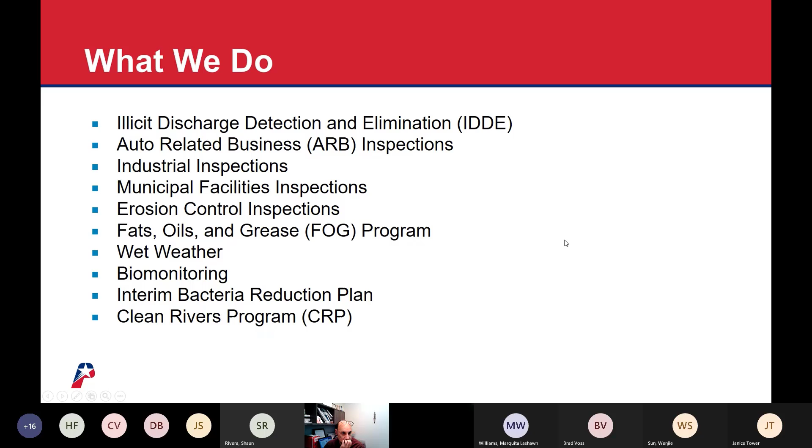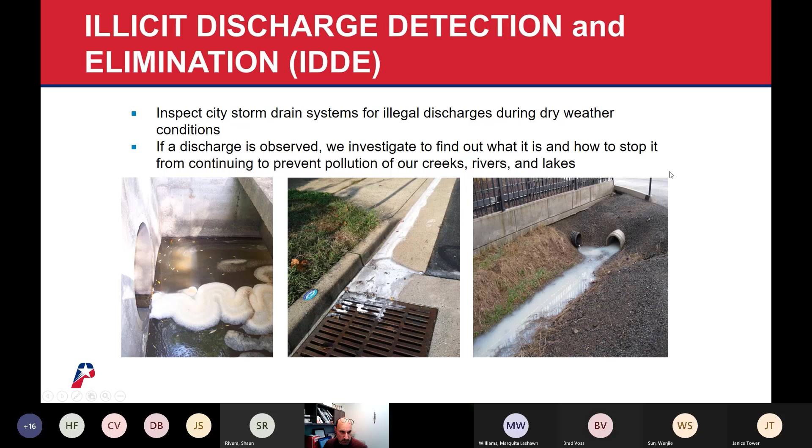One of them is our illicit discharge detection and elimination program, or dry weather screening, if you will. We inspect all of the city's storm drain outfalls that lead to a water body in Plano, and we inspect all of them within a 5-year permit term. That is for our municipal separate storm sewer system permit. If we observe a discharge that is or seems to be a problem, we will investigate and find out how to stop it and prevent the pollution from entering our creeks or waterways, or from further harming our waterways.

We also inspect auto-related businesses within Plano, every one once annually. We're looking to prevent stormwater pollution from oil or fuel spills left outside at these facilities, ensuring proper storage of chemicals, tires, and equipment. There might even be standing water issues that could lead to mosquito problems. We also look at their sand and grit traps and floor drains to ensure they're functioning properly and not going to overflow and cause further stormwater pollution.

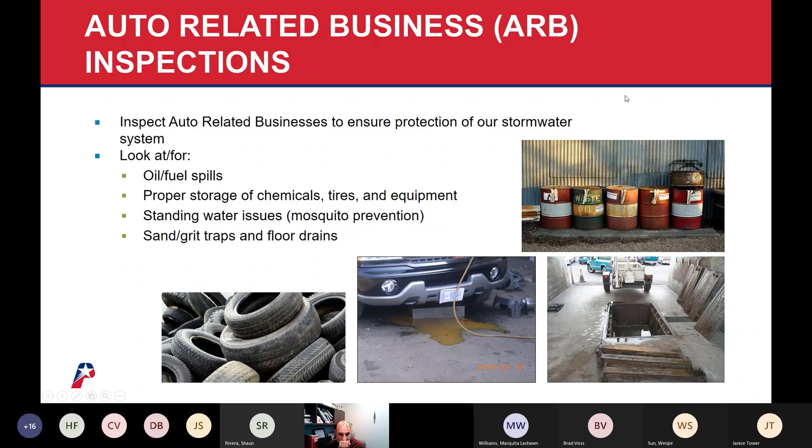Similarly, we do industrial inspections. We inspect TCEQ stormwater permitted industries to ensure protection of our stormwater system, checking each industry to make sure they have the proper stormwater permitting. This means checking if they have an exposure permit, meaning equipment such as barrels exposed to stormwater, or a no-exposure facility where all operations are indoors. We also check their yards to ensure there are no oil or fuel spills or other chemical equipment causing stormwater issues, and again look for standing water that could lead to mosquitoes.

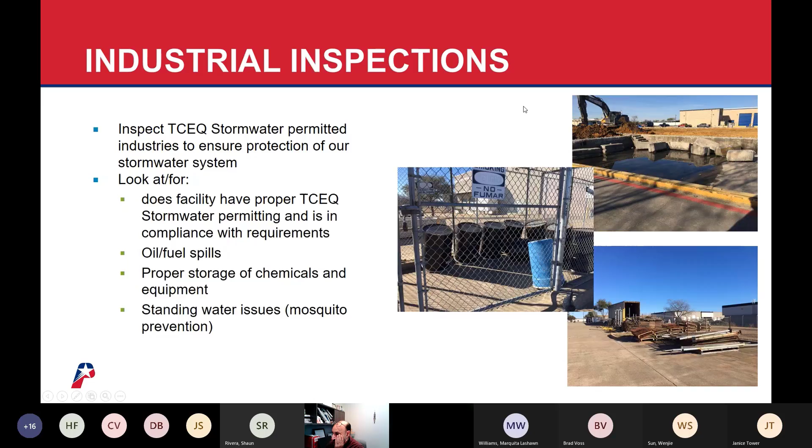Similarly, we look at our municipal facilities. We're inspecting every City of Plano owned facility to ensure it's in compliance with our MS4 permit, mitigating stormwater pollution through three tiers. Tier 1 is inspected annually, which includes facilities like facilities maintenance, where there's a lot of potential outside storage and vehicles that may contribute to stormwater pollution.

Tier 2 facilities are inspected every other year, and those may not have quite as much potential or outside storage. Tier 3 facilities are inspected once every five-year MS4 permit term. A lot of our city parks and similar facilities are in Tier 3, which have a lower probability of stormwater pollution.

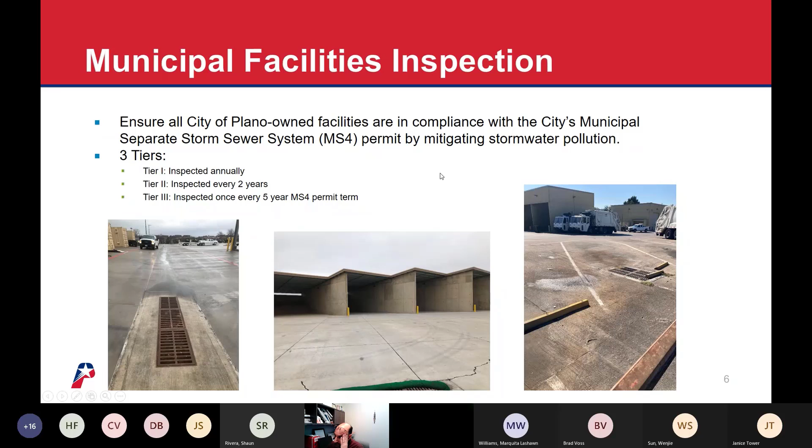One of our newest endeavors is our erosion control program and erosion control inspections. We have a team of two inspectors currently looking at construction sites to prevent sediment and construction material runoff. Currently we are mainly looking at single-family residences, and as the environmental quality team, we inspect these construction sites once they start going vertical. Our engineering department handles the stormwater construction inspections as streets and drainage are being put in, and then we take over once vertical building starts occurring. So we're really looking to help mitigate sediment pollution, which is one of the top polluters in Texas.

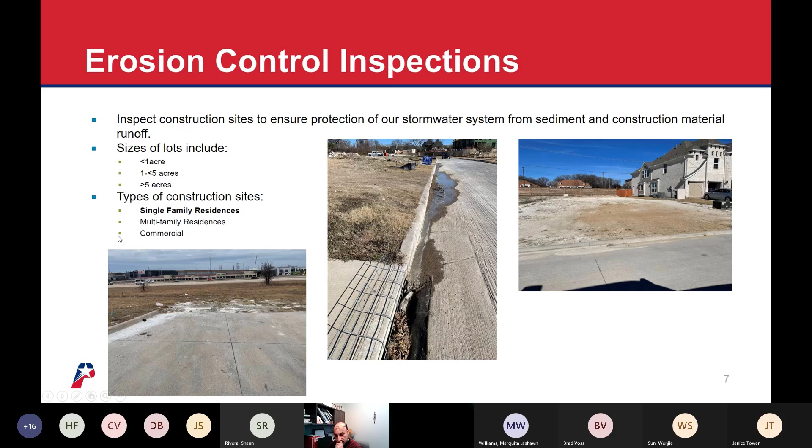We also have our fats, oil, and grease program, or FOG. We have a team of two inspectors inspecting the grease traps and grit traps here in the city of Plano. These traps are permitted by our department with each facility, and our goal is to inspect every trap at least once a year to ensure they're functioning properly, and that the operator is pumping the trap as frequently as necessary. Grease traps need to be pumped every 90 days, and grit traps every 180 days according to our ordinance. This helps prevent sewer overflows, which can add bacteria and nutrients to our streams, and also helps prevent our sewage system from getting blocked up with fats, oil, and grease.

We also conduct wet weather samples. We have two sites in each of our four major drainage basins, and we try to do all of those sites each year. In each drainage basin we have one site that's more of a residential drainage and one that's more of a commercial drainage, so we're looking at what's coming off these two different types of areas. If we find an area that samples high for E. coli or oil and grease, which are our two main samples, we survey that area and attempt to investigate if there's a source that needs to be remediated.

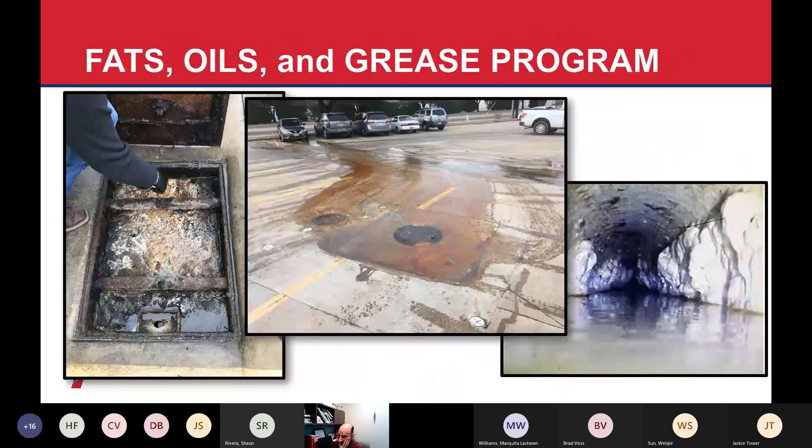We also do a biomonitoring program in our four major drainage basins. These include the Cottonwood Creek drainage basin in West Plano, then White Rock Creek, Spring Creek, and Rowlett Creek, which is what we're here for today.

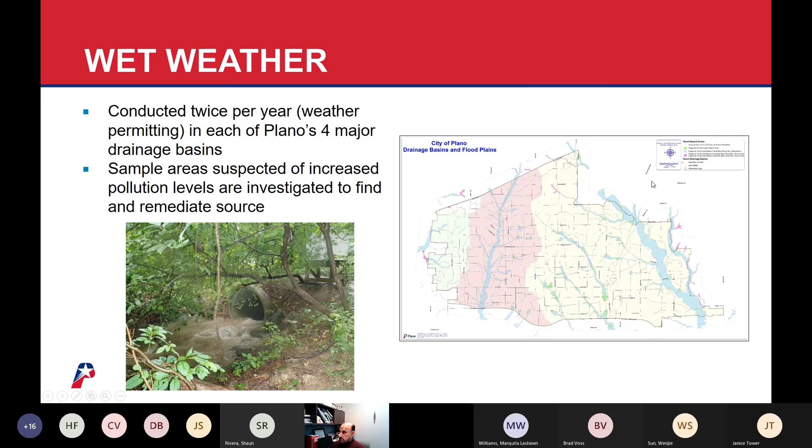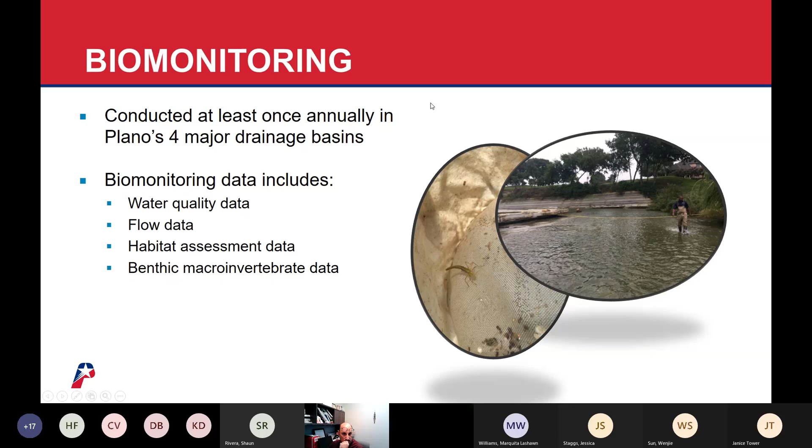For biomonitoring, we're gathering water quality data, flow data, assessing the habitat, and taking benthic macroinvertebrate samples. These benthics can be a great indicator of stream health. We do this during the critical period in August each year. We are still accumulating data and hope to begin assessing it, looking at the trends over the past few years of how our stream's health has looked.

More directly related to Rowlett Creek, we have our interim bacteria reduction plan. We are currently sampling 26 sites along Rowlett Creek, identified as impaired for bacteria, or E. coli. We sample quarterly at these 26 sites. We've gathered data since 2018 and are currently looking more into that data and the trends over the past 3 years, hoping to assess where these E. coli issues are coming from and find any trends within the sampling sites.

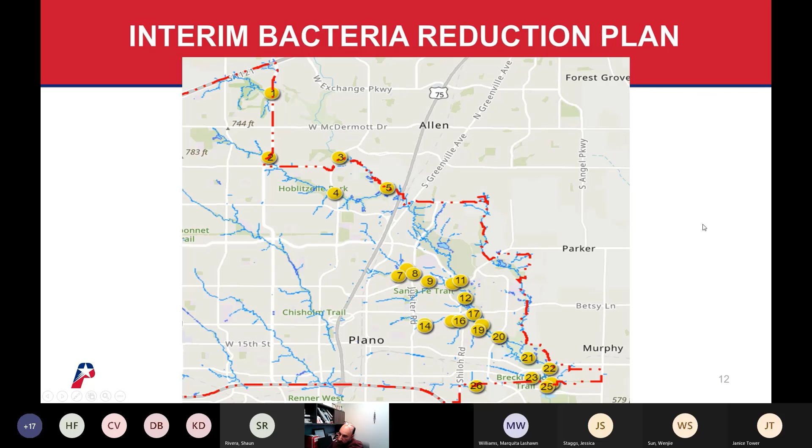Lastly, we are joining the Clean Rivers program, which operates under the Clean Rivers Act, passed by the Texas legislature in 1991, with a goal of assessing and improving the state's water resources. The TCEQ contracts with river authorities and other entities, and we are currently partnering with the Trinity River Authority and are going to begin that sampling project this year.

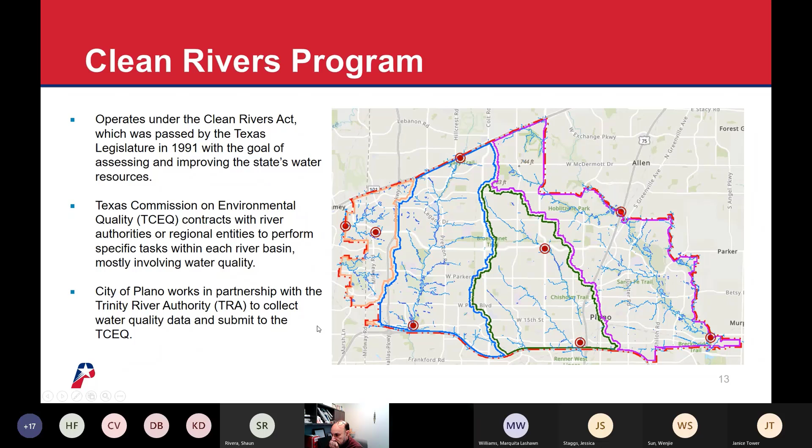Here I've noted the areas we'll be sampling. We're trying to look at the beginning of the watershed for each major basin and then the end, so where we're starting and then what's coming out of Plano. We're really excited to begin this program and start gathering this data.

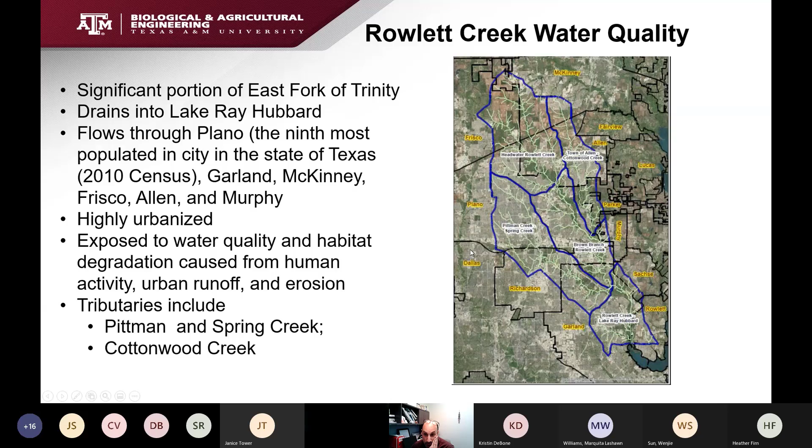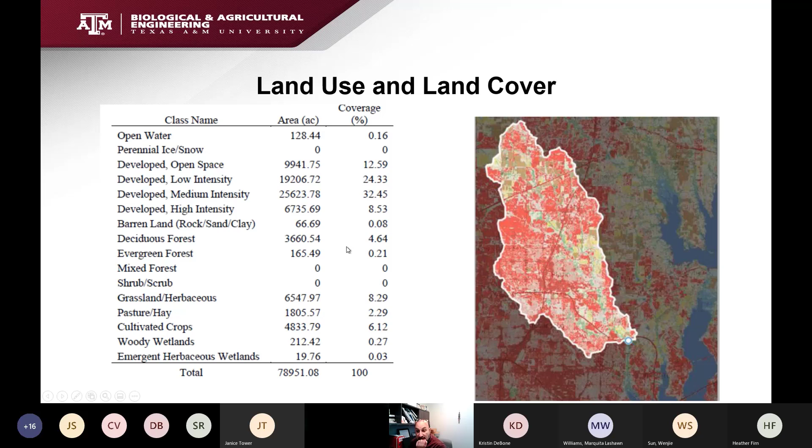The reason why we have this meeting is because the watershed is impaired. Basically, TCEQ every couple of years, there's one due this year, produces a report called the Texas Integrated Report of Surface Water Quality. Based on regular testing of different streams and comparing the different pollutant concentrations to the allowable limits, if these numbers exceed them, in either averages of several tests that exceed a certain acceptable average, or one test is very high, then that stream is considered impaired.

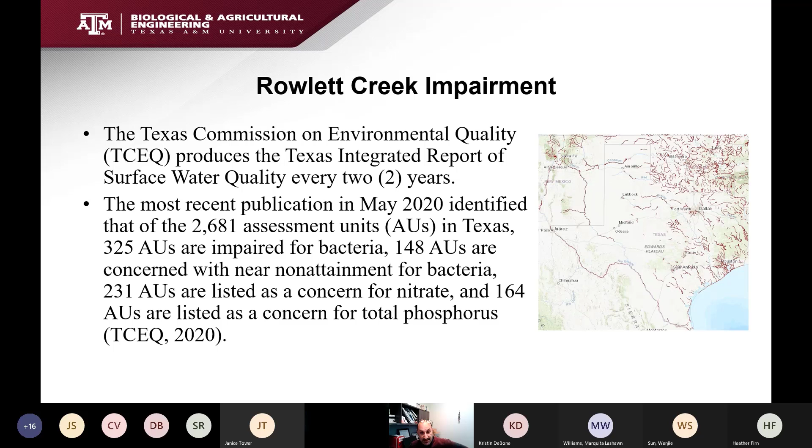In May 2020, which was the last published integrated report, they assessed 2,681 stream sections, and identified that many as impaired overall. 325 of these were impaired for bacteria, which is what Rowlett Creek is impaired for, and 148 had a concern they were close to being impaired. Then 231 were listed as concern for nitrate, and Rowlett Creek is a concern for nitrate. 164 were listed as concern for total phosphorus; ours is not a concern for total phosphorus, although we are measuring it to make sure this stays true during the project.

So Rowlett Creek was originally placed on that integrated report back in 2004. It's called the 303(d) list, and it's still listed in 2020, so it has not improved as a result.

And that's why we're having this project, in order to look at ways that best management practices can be implemented to improve the water quality in Rowlett Creek. What the city of Plano is doing is already amazing, and hopefully we can build on that and add more options and suggestions, such as green infrastructure.

So it was also listed in 2004 as a concern for nitrate. And so that means that nitrate levels are high enough to be a concern that could result in impairment, but not yet. And it's still listed as a concern in the 2020 integrated report.

So what is E. coli? What is that bacteria that is causing the river to be called impaired? So E. coli is a naturally found bacteria. It looks like this hairy little swimming alien. It's found in the intestine and the stomach of warm-blooded animals in general. We have a lot of it in our own stomach naturally. Most of the strains are harmless. Some do cause problems, or sometimes also imbalance.

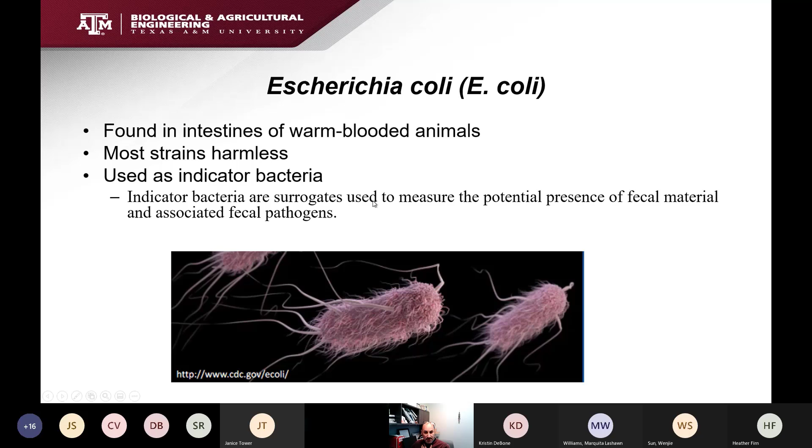That said, we know for a fact that there will be some because of wildlife, because of pets, and also these OSSF, so on-site sewage facilities. All those could result in leaking of certain material that will show E. coli. But the question is, is the amount of E. coli reaching the river high enough that this stream is impaired? In this case, yes. And this whole project and a follow-up project that will develop a watershed protection plan aim at suggesting and developing methods that we will model and show that the implementation of such BMPs will result in an improvement in the water quality of the stream.

Nitrate nitrogen, again, we mentioned that the creek is a concern for nitrate nitrogen. Nitrate nitrogen is commonly found in fertilizer. So every time we fertilize our lawn, yard, or if there's ag land fertilized, there's a chance that nitrate, which is water soluble, leaches with the water, and high concentrations of nitrates are found in streams in the area. Also, this is not the only source. There's something called the nitrogen cycle. I'm not going to go in detail about it, but basically ammonia can become nitrate in some form. There could be a cycle that will produce nitrate. The decomposition of plants results in nitrate. The decomposition of animals too, and fecal material of animals can produce nitrate. So there's a lot of sources of nitrates.

High nitrate in water is dangerous. There's a blue baby syndrome. If nitrate is above, I think, 10 milligrams per liter, it can result in what's known as blue baby syndrome. Of course, a lot of that water is treated before we drink it, but in case there's direct contact with water, it's something to be concerned about. So reducing nitrate is definitely one of the objectives of this project. Also, when nitrate comes in high concentration in areas where water accumulates, maybe at receiving lakes like Ray Hubbard, high nitrate volumes can cause algal blooms, which in turn, as the algae dies off, reduces dissolved oxygen and could result in fish kills in some streams.

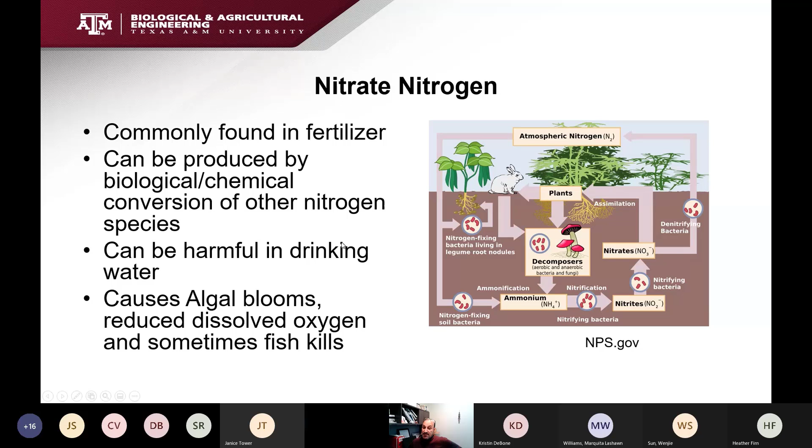So what's this portion of the project aiming to do? So this project has three main activities. And this project, by the way, ends at the end of August, and we are now currently in negotiation with TCEQ to hopefully receive a follow-up project so we can complete the watershed protection plan. And so in this project, we're collecting data on water quality. I'm going to go into detail about this a little bit later.

There's existing sources. Keith mentioned that they've been collecting data from 2018. TRA has data from previous times that are published on the TCEQ water quality websites, SWQMIS. And also, we've selected 5 sites so that we can more easily identify where the E. coli is mostly coming from in these 5 sub-watersheds right here, because the data that we have right now does not allow us to identify where it is coming from directly. So we're doing some site monitoring to understand better the sources of the E. coli and the nitrogen.

And we're ongoing with this. Then we're going to take that data and we're going to do some modeling. We're going to be identifying sources of pollution. We're going to use 3 methods of modeling that I'm going to talk about later, basically load duration curve, SELECT, and SWAT to model this watershed so we can understand

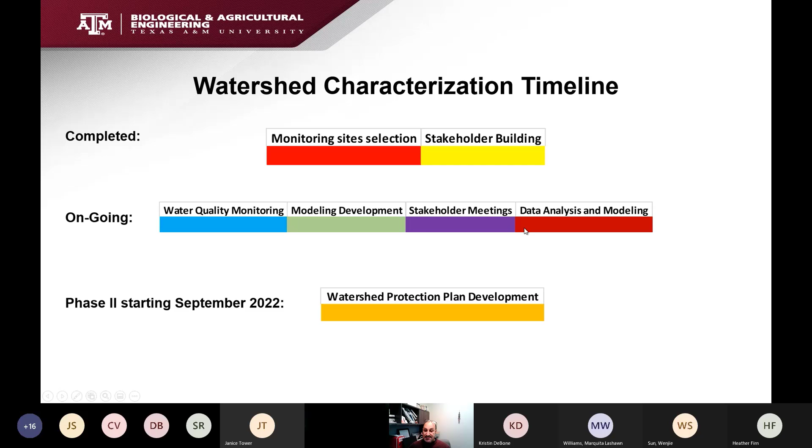Now, as I mentioned, we are looking to continue this project for another couple of years, and we will focus at this point on developing the full watershed protection plan to submit to TCEQ and EPA for approval. During this, we will continue stakeholder meetings, and we will do some additional modeling, mostly as it relates to BMP performance and ability to bring Rowlett Creek out of impairment. And so hopefully this phase 2 will start in September 2022.

So here are the tentative dates that I have for the remaining 4 meetings for this project. Next month we'll have one. Maybe it will be a little bit shorter, but we'll have at least some information to share with you. I'll present to you some of the water quality data that we got, and we'll see if we have our modeling QAPP approved. Maybe I'll share with you some results of modeling. This is to be decided. I'm skipping March as it's spring break time, and maybe a lot of people won't be able to attend. And so we'll do the next meeting on April 27. All these dates are the last Wednesday of the month.

So April 27 we'll have the 4th stakeholder meeting, and we'll have one on May 25th. We'll skip June and do one in July, because in July we would have a lot of information about this phase of the project. So this would be the stakeholder meeting where we present and seek feedback on the results of this phase of the project. After this, once we know that we're continuing and developing a watershed protection plan, we will have quarterly meetings for phase 2 throughout the life of the project. So if it's 2 years, we'll have 8 meetings to continue the work on this watershed protection plan.

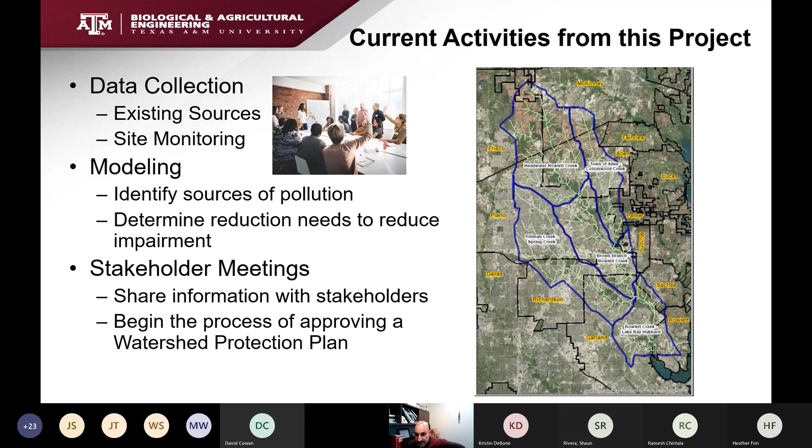Okay, well, with this, let's go to the second portion of this meeting. I've partially talked about this in the last meeting, but since it's been a while, it's a good reminder. And then at the end of this, we'll talk about the steering committee, which is really an important part of today's meeting.

So a stakeholder in general is someone who is involved in a project and does make decisions and implements them, actually. So people who live there, people who work there, people who own property there, organizations, industry locations, all these count as stakeholders. Anything that happens in the area, they'll be affected by those decisions.

And the reason they're stakeholders is that these watershed protection plans are actually stakeholder driven. So we will do some scientific analysis and present it, and we really look forward to feedback from the stakeholders with regard to how to direct and what to put into that watershed protection plan. I was just answering Ramesh that if we find this, we will recommend this.

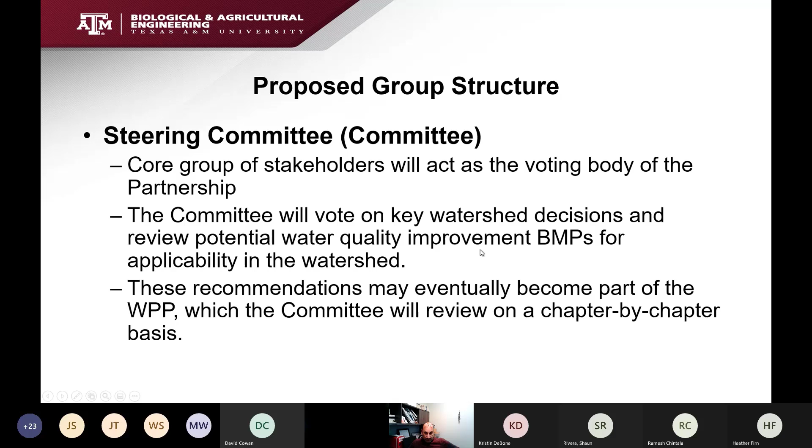How can you get involved beyond coming to the stakeholder meeting? You're already doing the number one. If you're interested in becoming part of the steering committee, please make sure that you nominate yourself, or if you want someone else to be a member of the steering committee, also nominate them. The partnership has 4 meetings. We will have at least one meeting before the partnership meeting to discuss stuff. So it's really a small commitment to be part of the steering committee. Maybe instead of attending 4 meetings, you will attend 8 in total, unless there's something urgent and we call for a fast additional meeting. But the plan for now is to have one meeting in addition to the general partnership meeting.

And same thing with phase 2 of the project. If we're having quarterly meetings, we probably will have quarterly steering committee meetings, I think at this point, unless we find a need to meet more for that.

So I'm lying right here. I said I was going to send a survey to solicit participation. I'm doing it orally, really. I'm soliciting participation right now. I'm going to probably send an email to the email list this week, maybe by tomorrow, also soliciting steering committee participation. And then once we have a list, we'll come to the meeting in February and vote. The partnership will vote on accepting the steering committee. There's no limit on the total number. We'll have to discuss it. I'm going to show you in the next slide who should be on the steering committee.

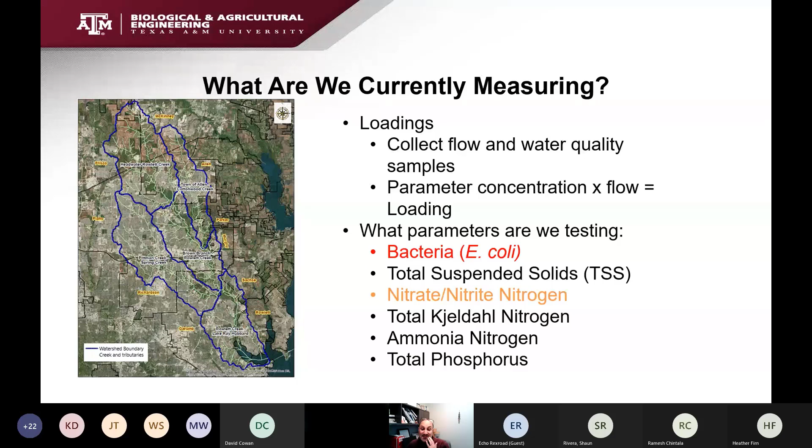So for example, if the nitrate is 10 milligrams per liter, and we have the flow that can be converted to liters per minute, by multiplying this we will have a loading, which is a total amount in a period of time. And loading is the way you can measure what the current condition is and what the condition needs to be. So in order to analyze these loadings, we need to analyze that data.

The data we collect, these measurements, will give us baseline knowledge of what's happening right now in the different sub-watersheds of Rowlett Creek, and then do they change over time? We take routine samples once every quarter, and now in the next 5 months we're going to try to have 1 or 2 samples a month. We take samples during storms, and that's going to tell us if there are trends.

Is the winter data different than the summer data? What does that mean in general? How is that related to what's happening in the watershed? Is there any area of concern more than another? Is that part of the watershed producing more nitrate while this other one is producing more E. coli? Is there a particular tributary that needs more focus? All that is going to show with this water quality data and these loadings.

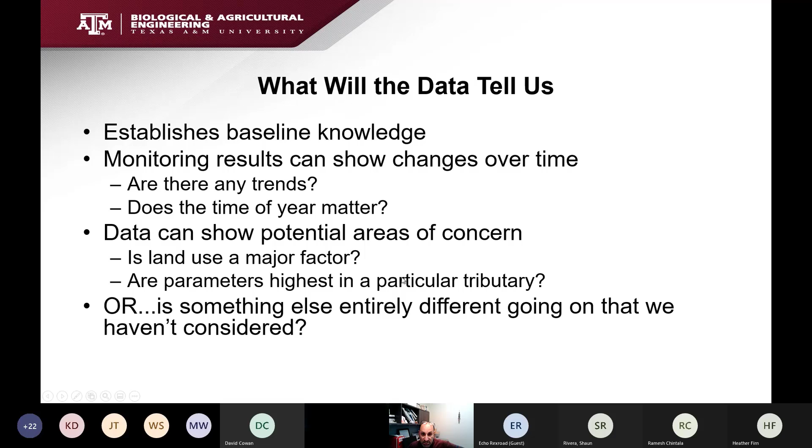It could be something else. Is there, I don't know, a wastewater treatment plant that is changing the data? So by looking at the data, we might be able to understand things we haven't thought about. The data will be presented and then discussed, and this is where local knowledge can come in. I might not be able to understand why something is happening here, and someone in the stakeholder group can tell me, well, this area has this type of use that is common, and that makes sense, so that could provide us with a lot of help.

And then eventually, when we're looking at ways to reduce pollution in the stream, we will be able to come up with a plan that will target specifically these areas if this is thought to be the main source of the pollution.

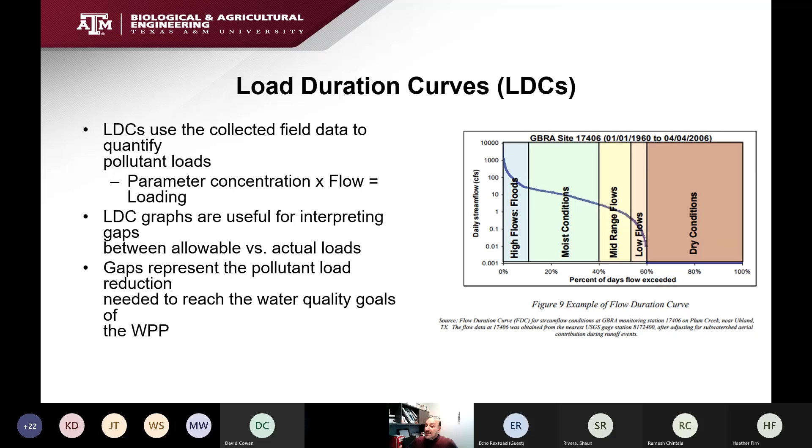Interns have asked what they're doing. You'll be working on graphs like this, and we'll share the data with you so we can understand what's happening. That's going to help a lot in understanding—as I mentioned, one of the objectives of this proposal is to understand how much we need to reduce the loading in order to bring the stream out of impairment.

The second model we're going to be using is called SELECT, which stands for Spatially Explicit Load Enrichment Calculation Tool. We're going to start working on this once we have permission, once our modeling QAPP is approved.

Basically, we're going to bring spatial data from different sources—land use data, population data—and associate these with potential fecal production rates. For example, we can get the average number of households, and then the average number of dogs or cats in the household in this region. We plot these in SELECT, and it will give us the potential fecal production rate from that watershed.

Again, it assumes it takes these numbers of averages and applies them to all these areas. So it can give an overestimation of sources, but it can be looked at as a worst case scenario, which is going to be very helpful in our analysis.

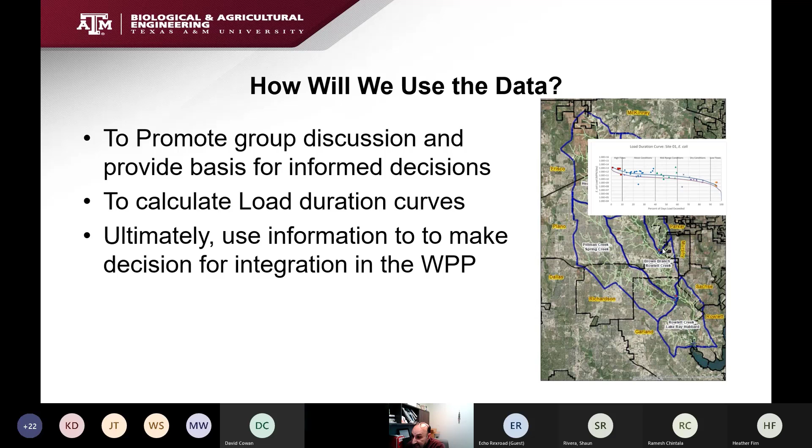As a result, by calibrating the SWAT model to match that USGS station based on actual conditions in the watershed, we will be able to extrapolate flow rates in different locations, which we can improve by comparing these numbers on specific dates with the flow data from the ISCOs.

So the SWAT model, which is the Soil and Water Assessment Tool, is going to be used to delineate some parts of the watershed and then eventually run flows to determine flow rates in different locations that could be used in load calculations.

SWAT is a hydrologic model. It's actually the most widely used hydrologic model in the world, according to a paper that was published in Nature a few years ago. It takes the elevation map, the land use map, the soil map, and mixes those together to create hydrologic units.

Then you put a storm event in there, and it uses physical and empirical equations to calculate how much of that water infiltrates, how much runs off, and it does it in time steps, so you can figure out the flow at any time during the period you're running. As a result, you can identify flow rates in the stream at different times during your run, and knowing water quality at that time, you can produce loadings for times where you didn't have actual flow measured.

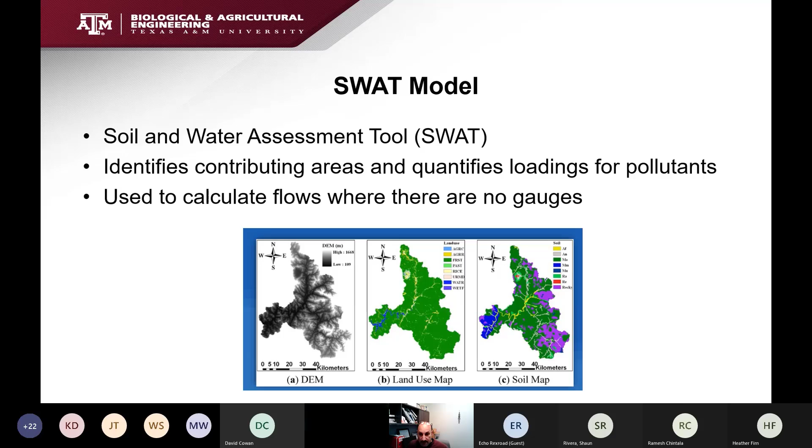And at this point, we can start taking more questions. If you have any points you want to make, discussions related to this, this is the time.